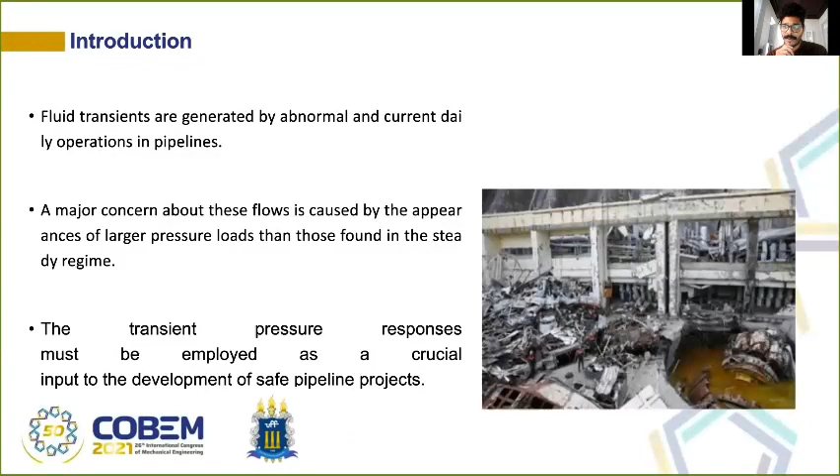Here is a figure. In this figure, we find the power of destruction of this phenomenon. The onset of this tragedy was a transient flow, an uncontrolled transient flow. This is a picture from the Russian hydropower plant. That's it.

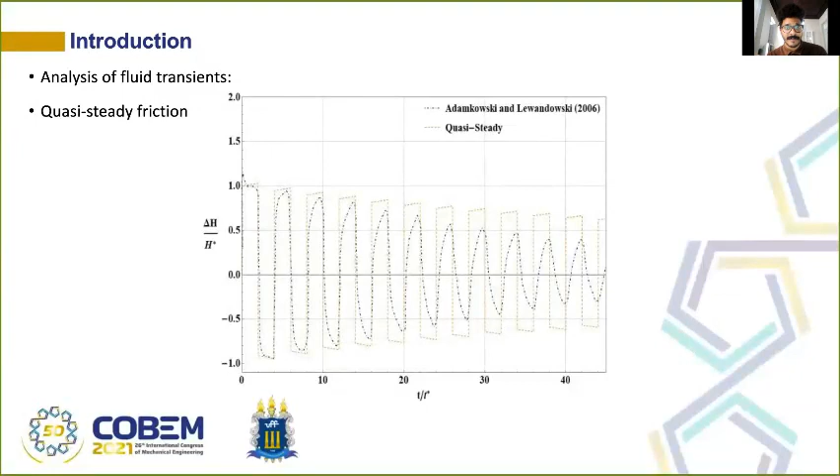And so if you use just the average velocity of the flow in the fully developed friction equation, you can't capture this behavior. And that's why the responses of the experimental data and the quasi-steady friction are really different.

So to overcome this limit of using the quasi-steady equation, researchers proposed a different approach to capture this local and two-dimensional effect of the velocity profiles of the flow during the transient. So there are basically two different approaches regarding the number of spatial coordinates: the one-dimensional and the two-dimensional approach.

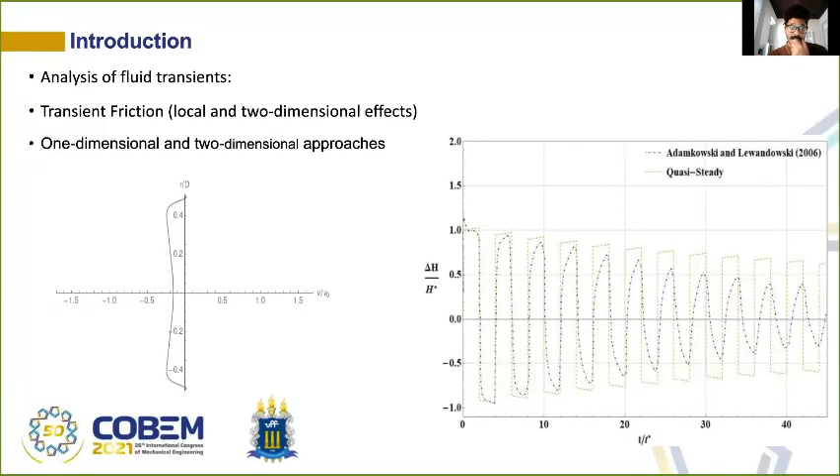Each approach has advantages and disadvantages. For one-dimensional, the main advantage is the low computational cost and easy computational implementation in practice. However, it does not see the internal structure of the flow, velocity profiles and shear stress profiles, that are really important for some hydraulic applications. And some approaches don't seem to obey the second law of thermodynamics.

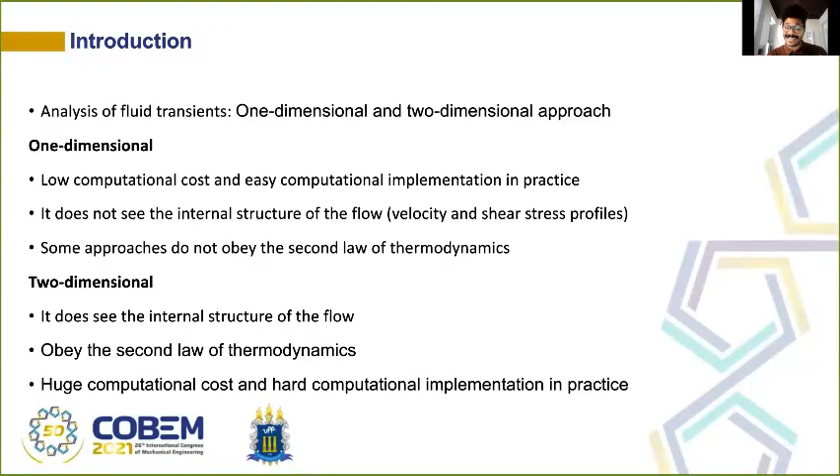The two-dimensional does see the internal structure of the flow and obeys the second law of thermodynamics. However, there is a huge computational cost, and there is a hard computational implementation in practice.

And here it goes, the main goal of this work, that is to propose a thermodynamically consistent model that gathers the advantages of both modelings. In other words, easy implementation and still one-dimensional, but can see the internal structure of the flow and obey the second law of thermodynamics. And we will do that with the use of the continuum theory of mixtures.

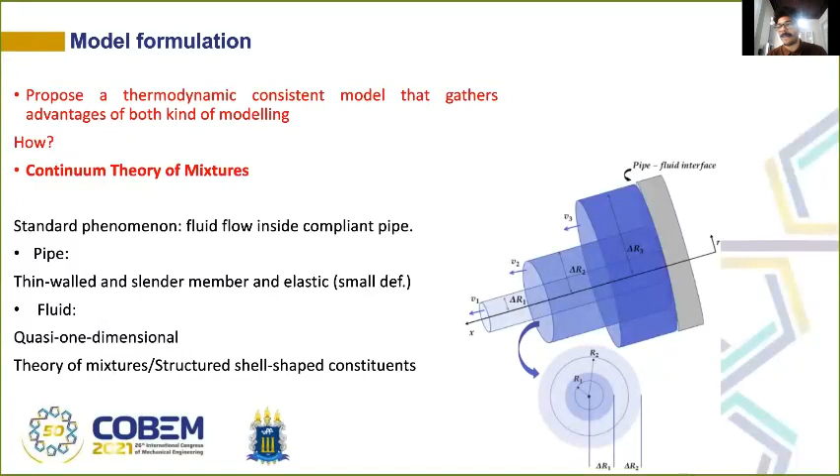So let's start. The studied phenomenon is fluid flow inside a compliant pipe. The pipe is assumed to be thin-walled, slender, and the behavior of the pipe is elastic in the small deformation range. And the fluid in this kind of modeling is assumed to be a mixture, a structured mixture formed by shell-shaped constituents, as you can see in this picture. So indirectly, the velocity profile of the flow is captured, then the friction that is actually happening during the transient is captured.

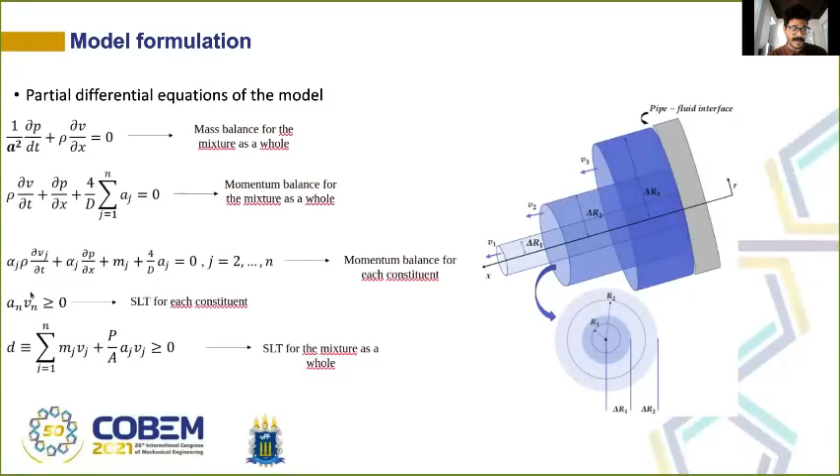The governing equations of the model are the mass balance for the mixture as a whole, the momentum balance for the mixture as a whole, and the momentum balance for each constituent, which is required for a well-posed problem when you use the mixture, and this equation is exactly where the velocity profiles of the flow are captured. And as we are also seeking the thermodynamic consistency of the model, we also postulate the second law of thermodynamics for each constituent and for the mixture as a whole.

So we wanted to make this model computationally efficient. So we will do in the following an analysis of the distribution of the constituents, the number of constituents. And this strategy is basically, we will see the responses for mean pressure, mean velocity, and velocity profile of two different meshes, one uniform with 5, 10, 40, and 80 constituents. Uniform, I mean, same thickness. Our constituents have the same thickness.

And mesh 2 is non-uniform. This mesh 2 will be formed by 5 thicker constituents in the inner regions of the flow, and 5 finer constituents in a region closer to the wall. Why do we do that? Because as you saw in the small video that I presented, there is a rising of high velocity gradients next to the wall. So it seems that that is the most important region of the phenomenon.

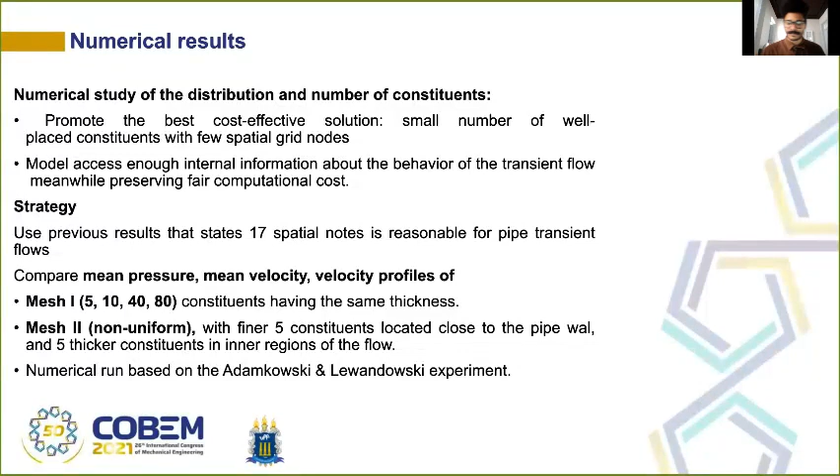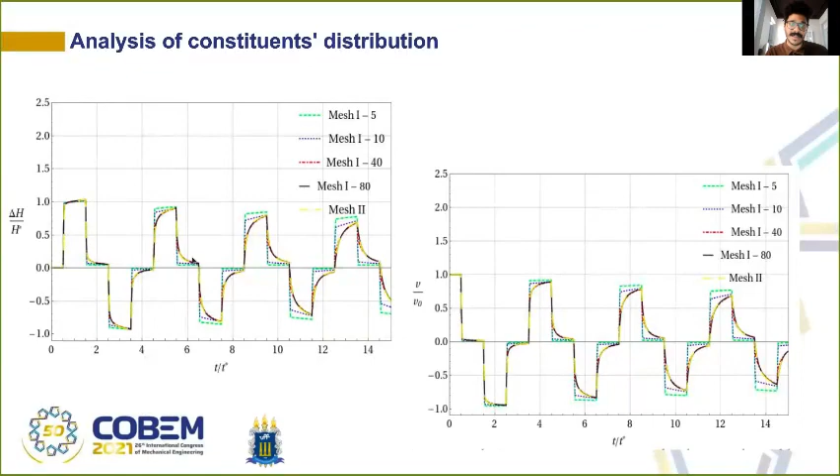The surprising result here is that mesh 2, the non-uniform one, with just 10 constituents, also has roughly the same response as the finest uniform mesh, mesh 1 with 80 constituents, as you can see here. So, as I said, mesh 2 is enough to get a precise and quite reasonable transient response.

And to assess the ability of this setting, in other words, the use of mesh 2, in providing accurate results, we will compare the response of the proposed model with the two-dimensional model of Riasi et al. that applied the k-omega turbulence model. And also we will compare the CPU computational time, taking as reference the numerical run carried out by Duan et al. that applied the 2D five-region turbulence model of Vardy.

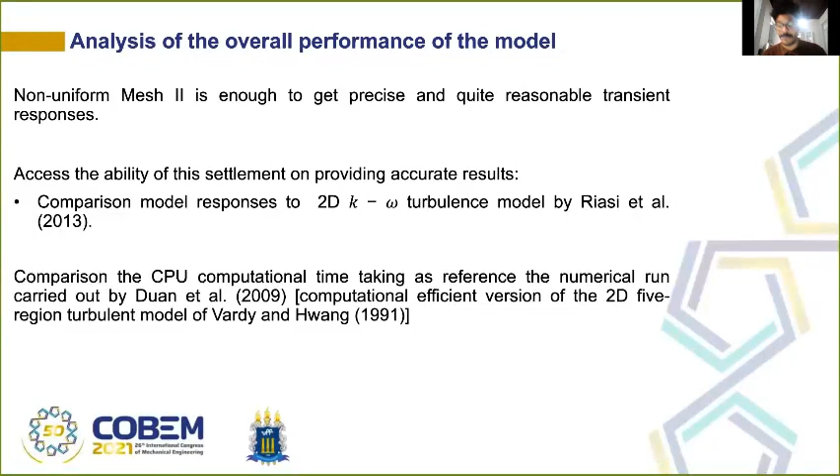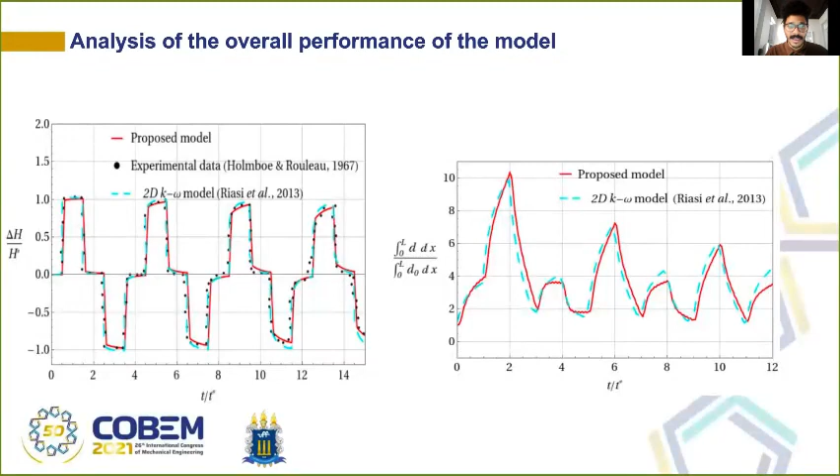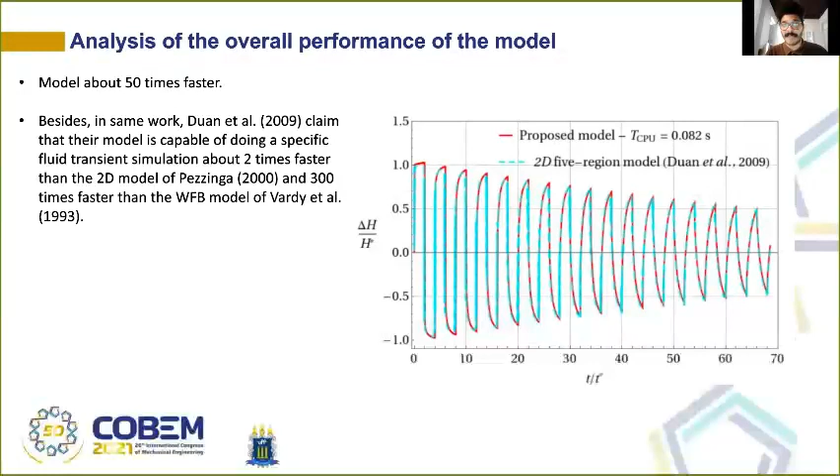And the computation is really efficient because, as you can see here, the model runs about 50 times faster than the model of Duan and gets basically the same results.

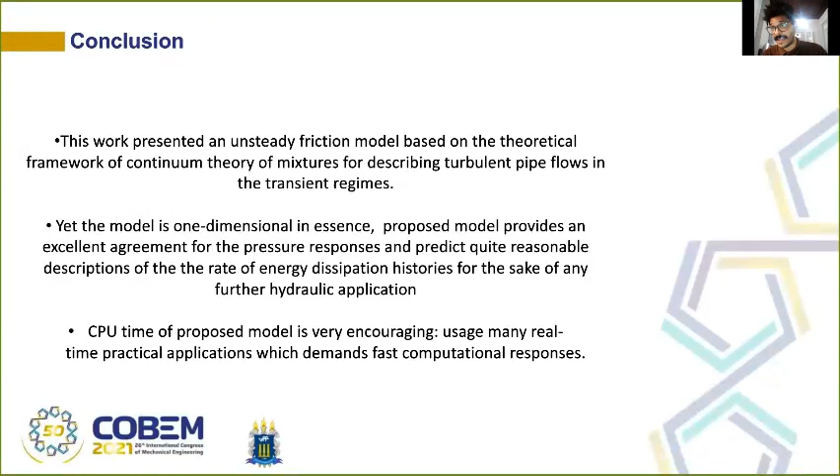Conclusions: this work presented an unsteady friction model based on the theory of mixtures for describing turbulent transient flows, and the model is thermodynamically consistent, it's quick enough for real-time applications, and can see the internal structure of the flow.